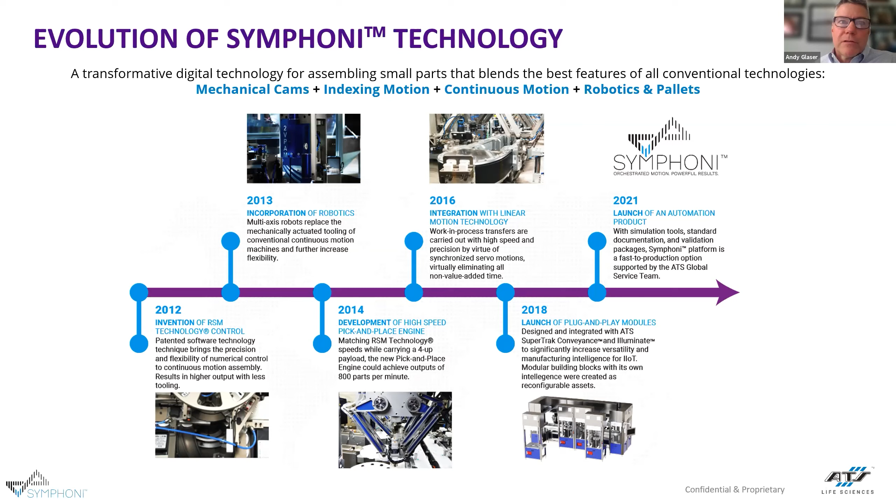ATS recognized the game-changing potential of Symphoni. It's a standardized modular automated technology that offers high performance, precision, and flexibility. In other words, a machine that didn't have to sacrifice speed for flexibility and vice versa, and a machine that offered an alternative to cumbersome, time-consuming custom solutions.

The best part about Symphoni for many of our clients is that you can start with just one of these modules, as you see on the slide. You can use that module, called Sonata, for research and development, clinical trials, or prototyping, before you have to go into low or higher output. And when you're ready to scale up, you simply add more modules. This inherent potential for scalability and simplicity is a big part of what ATS saw as a solution to current assembly problems. The Symphoni asset is completely redeployable, and that is a game changer.

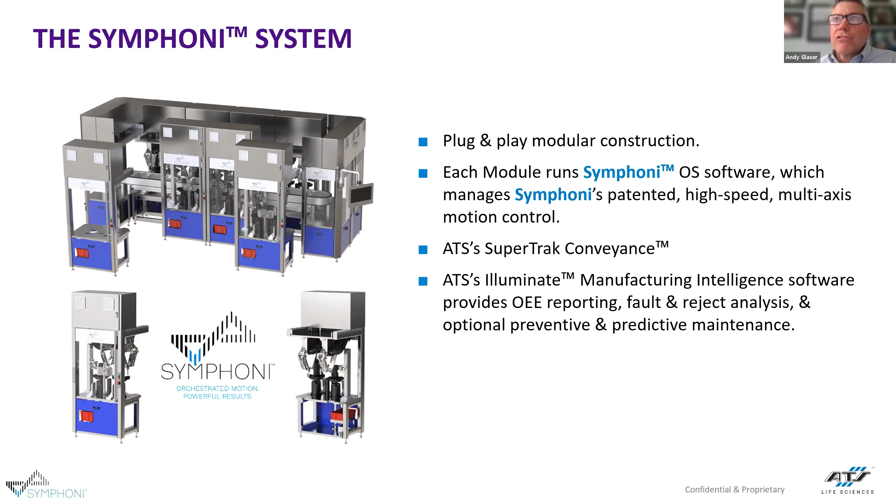We also saw a far more specific synergy, a way to incorporate our SuperTrak conveyance technology and our Illuminate smart manufacturing software. These technologies significantly build on the core premise and make Symphoni the complete package it is today for anyone in the med device assembly business.

So what does all this give you? In short, Symphoni provides the lowest total cost of ownership because of its standardization, modularity, ease of use, and low maintenance. Symphoni improves product quality because of its gentle part handling with friction-free orientation. Symphoni reclaims expensive floor space because of its reconfigurability, as well as its ability to be continually redeployed throughout its life. Symphoni optimizes your assembly equipment due to its operational flexibility and quick changeover.

Thus, the core Symphoni DNA made up from these attributes is why there is now a totally different approach to how high-speed assembly can be automated. Faster time to market, reduced capital investment, and a lower overall price per part translates to a big advantage for manufacturers.

In 2018, when ATS acquired the Symphoni IP and joined the journey of this technology, our CEO, Andrew Hider, said that it was to develop market-leading solutions. With today's generation of Symphoni, we have already demonstrated with real customer projects that we are leading. Now it's time to see for yourselves what I'm talking about.

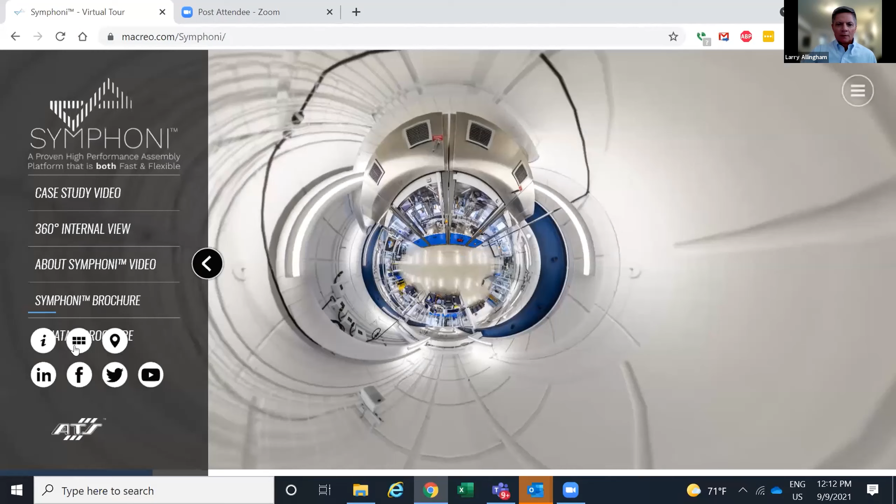Again, I'll add my thanks and appreciation to all of you for joining this tour. It's unique, we haven't done something like this before, so hopefully it'll give you a good overview of what this technology is all about. So what I'm going to do is first orient you as to what it is we're going to take a look at and also where it's located.

As you can see on the screen, we've got a Symphoni machine, or Symphoni cell if you'd like to call it that, located at our Innovation Center at ATS in Cambridge, Ontario. I'll do a little scroll here so you can see how the machine is situated in our Innovation Center, where we're featuring Symphoni as well as other examples of ATS technology.

Before we plunge into details of the machine, I'll make a few introductory comments to reiterate some of the points that Andy and Peng mentioned in the lead up. Again, Symphoni is the technology. It's designed as a unique combination of high speed and flexible assembly automation.

It's packaged in a modular format, which gives it configurability and reconfigurability, meaning that it's effectively serving as a long-lived asset that can be repeatedly retooled for different applications if need be.

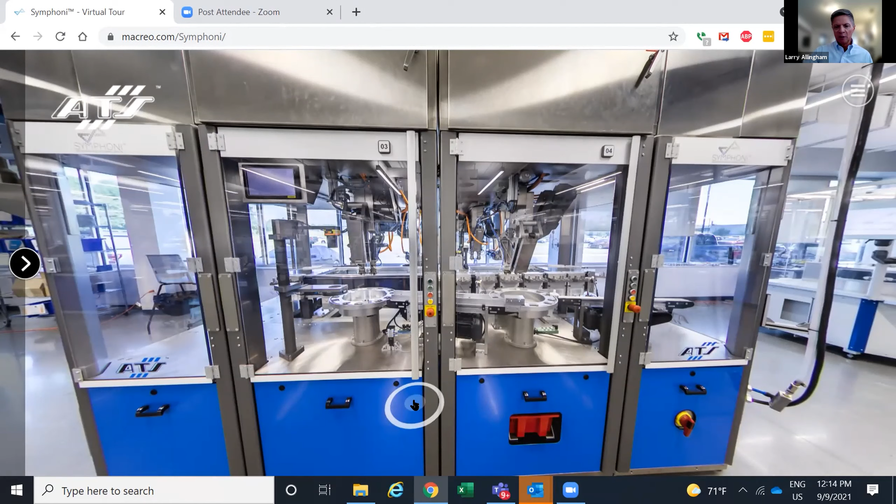First, to orient you a little bit into what you're looking at here, as we've mentioned, Symphoni is modular in nature. This small cell that we're using as our walkthrough this afternoon is certainly an example of that. You'll notice that this basically corresponds, where I'm taking my cursor here, to a module or a working module.

We have two working modules on this side of the machine, two working modules on the back side of the machine, which we'll see a little bit later. And then two other modules on the end that we typically refer to as end caps.

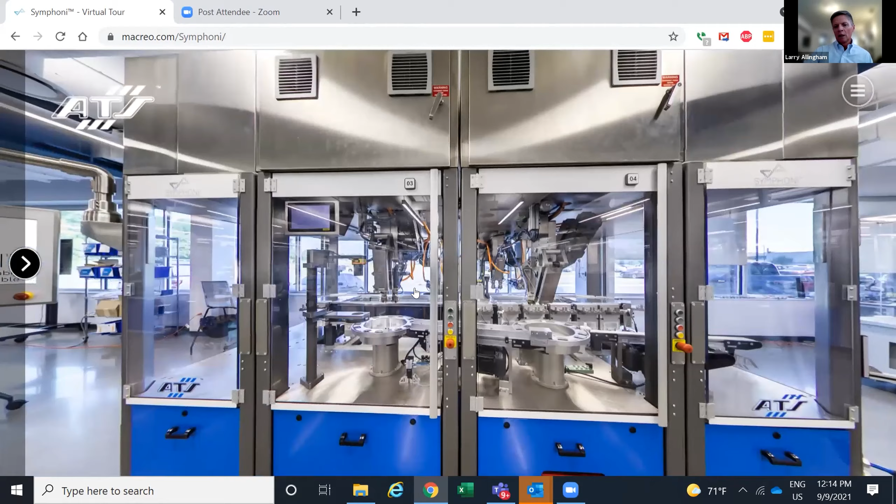One module receives the main power, electrical power and pneumatic, for distribution through the whole system. And the other module houses the electronics that control the SuperTrak conveyance, which is the basis of the transport mechanism for moving work in process through a Symphoni system.

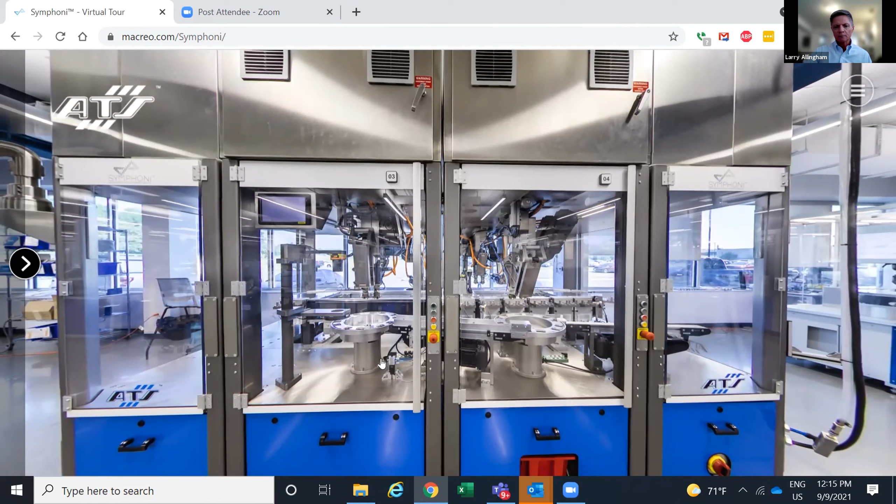To give you a sense of scale, each working module is 1 meter in width. So that gives you a little sense for the size of what we're talking about here.

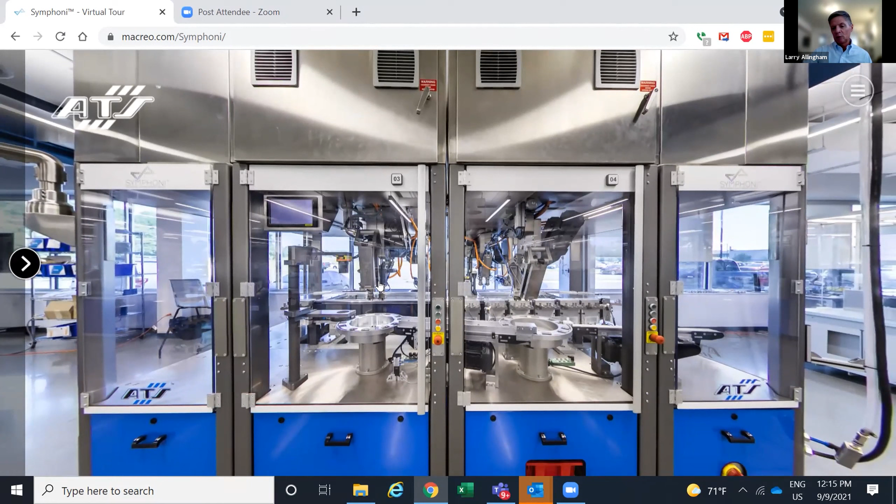You'll notice that within each module there is mounted above it an electrical cabinet. The electrical cabinet houses all of the controls associated with the local control of the automation resident at that particular module. In other words, the control is decentralized yet integrated in a centralized fashion, which you'll see momentarily, to allow the system, when running, to operate in a fully synchronous fashion.

I'll zoom in a little bit and give you a closer view of what we're going to be touring through here. The demo unit that we have basically consists of 4 assembly stations.

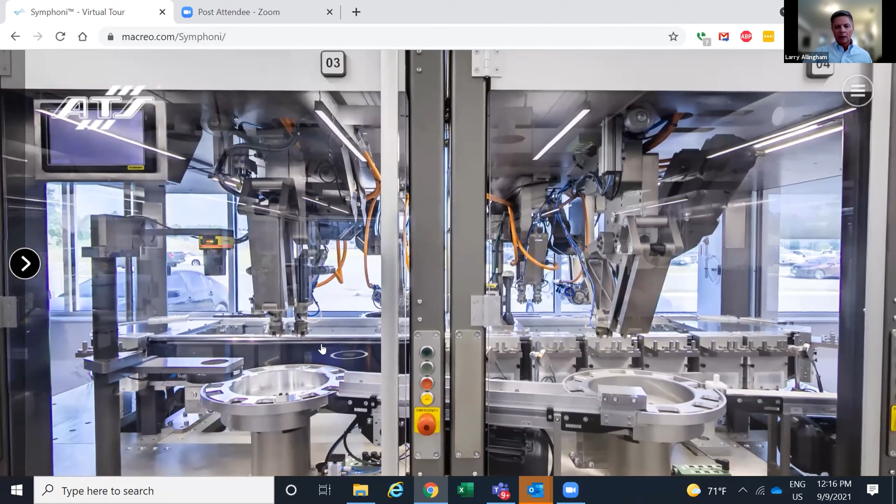We're assembling a dummy product. Basically we're assembling and disassembling repeatedly a simple 2-piece assembly, but a product nevertheless, that allows us to showcase some of Symphoni's operating features.

As I mentioned, the backbone of the system, or the transport mechanism, Symphoni being palletized technology, is the ATS SuperTrak. We'll take a look at that in more detail here momentarily.

You'll see that the workstations consist of a series of robotic stations where we have these Delta robots mounted effectively from above, again resident in each individual module.

I'm going to zoom in here, open up this door, and take a walk in and allow us to explore a little bit more deeply what we have.

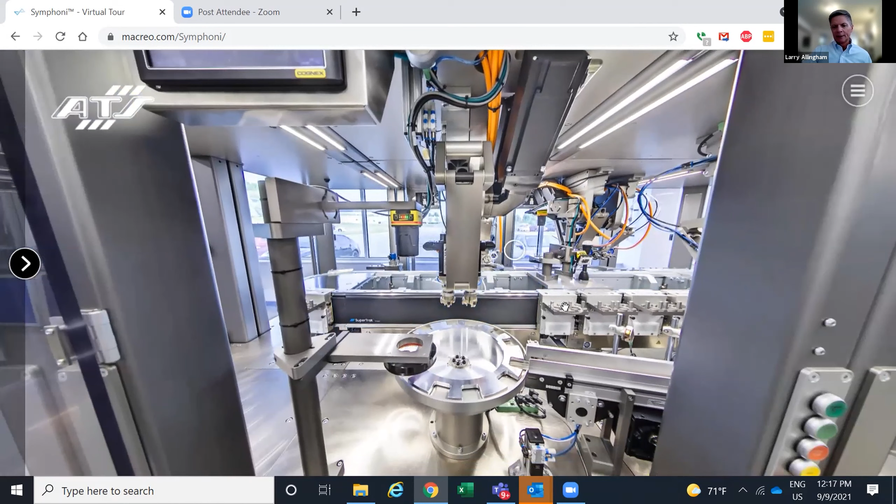So I've mentioned a couple of times the SuperTrak conveyance. Just a few words about SuperTrak. As Andy mentioned, that was one of the additions that have been made to Symphoni technology since ATS acquired it.

Basically, using this long-running flagship product of ATS that's been in operation for 20 years or so as the basis of moving materials through the system.

So SuperTrak is a linear motion conveyor, which basically means that the pallets in the system are moved electromagnetically. That gives very high speed capability for the pallets with precise control of their accelerations, decelerations, and positioning.

We're able to stop pallets at any point along the SuperTrak without requiring lift and locate mechanisms or any other type of external stopping or positioning mechanism. So it gives a lot of flexibility, very clean, low wear, high speed operation.

So I'm going to click this link here and allow you to take a look at a SuperTrak system, or a Symphoni system with SuperTrak, in operation.

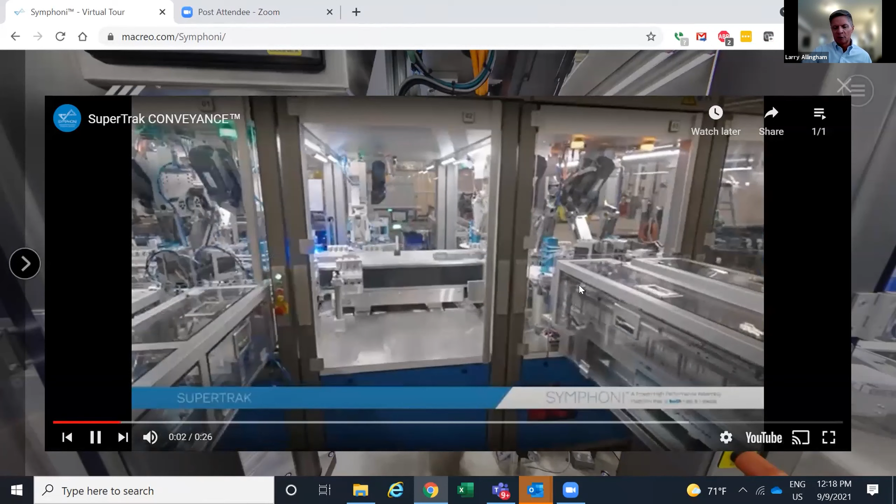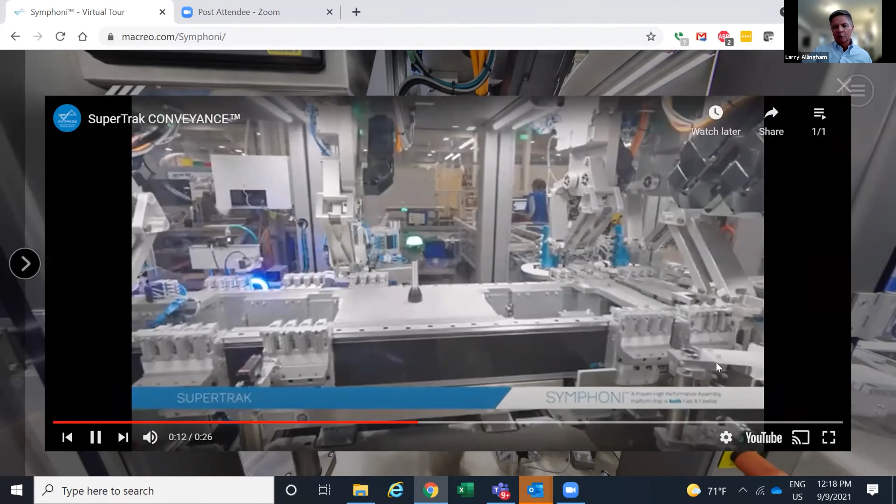It's not this machine, the demo machine, it's a production machine as it was being readied for a factory acceptance test at ATS recently. I'll let this video run through a couple of times, but you can see SuperTrak pallets moving freely, positioning themselves at different points, accelerating and decelerating rapidly to precise positions.

You'll see repeatedly as we go through our demo this afternoon that when SuperTrak is integrated into a Symphoni system, effectively what happens is we're able to take advantage of the high-speed positional accuracy of the SuperTrak pallet, synchronized with the motions of the high-speed Symphoni robots, such that pallets spend the bare minimum time necessary in each individual workstation to allow the operation to take place.

Returning to the demo again, to the unit that we're focusing on, we'll take a look first at this particular station, which is kind of characteristic of what you'll see throughout Symphoni applications. It's what we refer to as a pick and place station, sometimes called a pick and place engine. Basically what it consists of is this high-speed Delta robot.

I'll talk about that a little bit more momentarily, but as I mentioned before, it's mounted from the ceiling of the system. What the robot does is it interfaces with this device, which is what we call an RSM disk, or rapid speed matching disk. Andy mentioned that term in his lead-up, and you'll see what this really does when I start playing a couple of videos for you. Effectively what the RSM does is it serves as the intermediary between the robot, the pallet, and an external feed system for parts being delivered into the system.

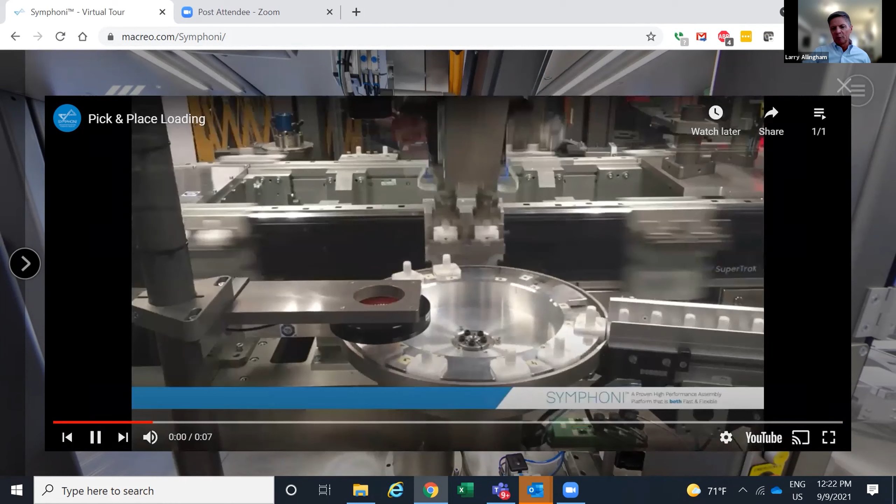And what this also does is very clearly indicate what is unique about Symphoni, because as you're seeing, as I let this video run repeatedly, high-speed pick-and-place operation: parts coming in, the parts can come in random radial orientation, our camera takes a picture of the part, the robot with its rotary end effectors picks the parts out of the disk during the transfer to the pallet, corrects the radial orientation, and places them on the pallet.

And again, with SuperTrak's high-speed capability and precision positioning capability, you can see that a very minimal amount of time that the pallet is actually in the station, and that the operations are basically carried out such that we already have the parts in hand in the robot as the pallet arrives. So really eliminating all of the non-value-added waste that typically occurs in an assembly system, a palletized assembly system in particular, where you're waiting for a pallet to come in, waiting for a signal to say okay, I can start my operation, carry out the operation, and then move on.

In Symphoni, everything is effectively electronically cammed together, all motions in the system, in such a way that we have complete synchronous operation, as if everything were mechanically geared, as if every single motion were on a line shaft. But it's digital and configurable and flexible, which is what gives it its unique power.

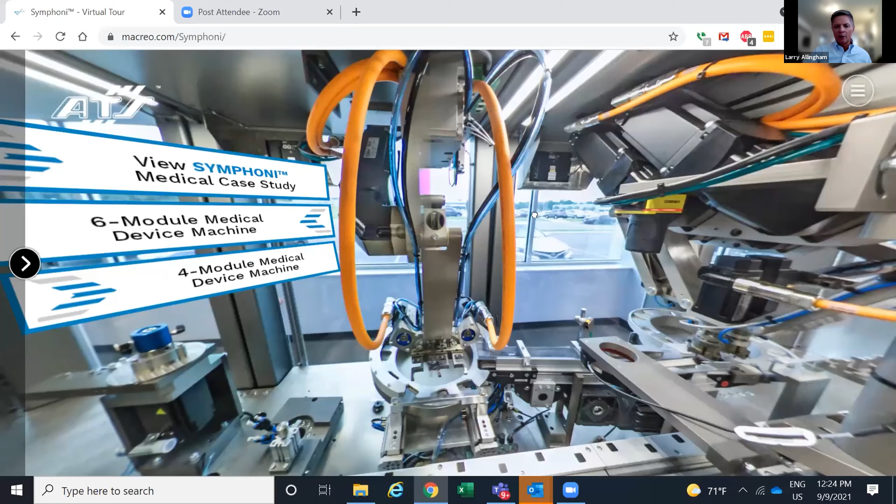So we'll jump in a little bit deeper here, again just kind of taking a quick tour around to see some of the other stations that are in the demo and point out some other features of the Symphoni technology. So the station that we just took a look at is this one right over here. We saw it from the view on the outside. This was the station just upstream of that that's delivering the parts to this particular station for orientation and placement. But taking a look here, we can get a little bit better view of what's going on with these robots, which are mounted at various stations around the unit.

So just a little bit of background on why is it that we have a customized robot as part of the Symphoni system. There's a couple of reasons for that. It wasn't the original intent when we were developing the technology.

We thought maybe we could use standard off-the-shelf robots, particularly high-speed deltas, to be serving as the basis for our operations. But we quickly discovered that because of communication requirements with external controllers and things of that nature, we couldn't get the throughput that we wanted to achieve with Symphoni with off-the-shelf robots. Furthermore, we needed to have the ability to do some pretty significant force-bearing operations that are characteristic of most assembly applications.

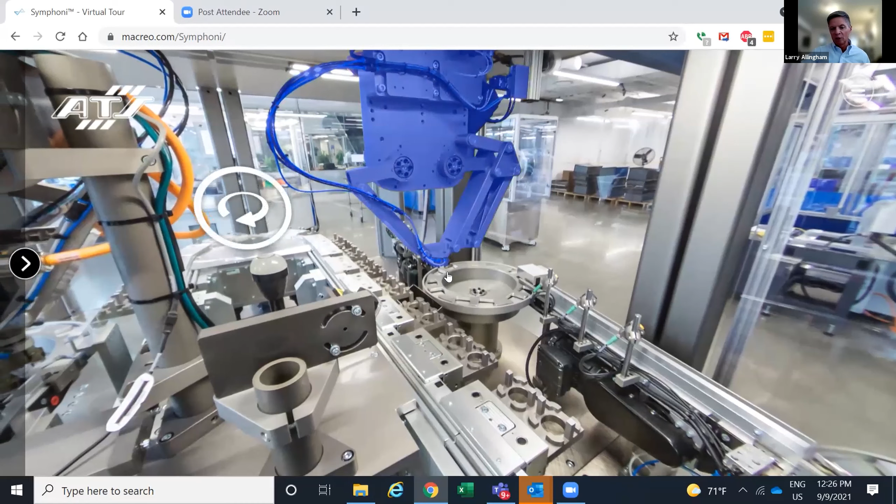And we're moving quickly in a very narrow band. We're just moving basically between the disk and the pallet. So we have a relatively low, short stroke in, let's call it the Y direction, and we also have positional capability in the Z location as well.

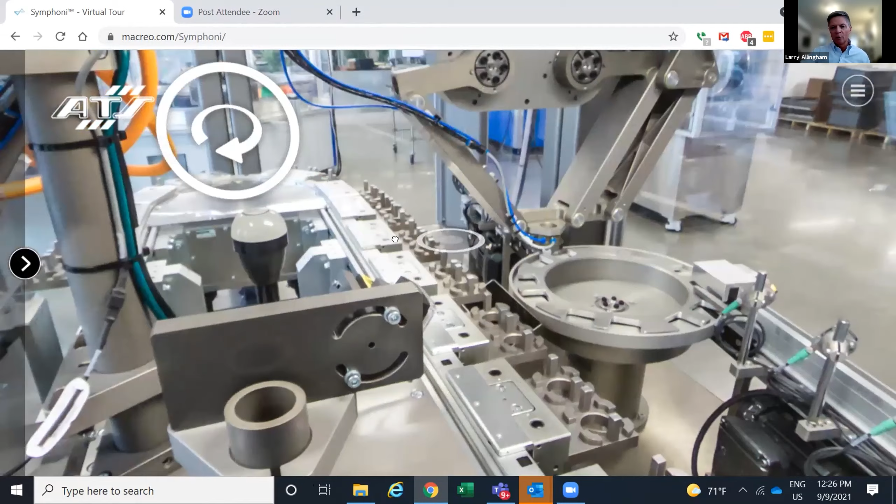And then, depending on the type of end effectors that we place on the end of arm tooling, you see different examples of that. We'll see more as we go through. We can carry out additional servo-based operations, whether it's inversions or radial orientations or what have you.

Let's go down to this end of the system, and hopefully I won't make you too dizzy here by kind of spinning around slowly and taking a look at the system from this particular perspective, and zoom in a little bit here to see some examples of different types of end effectors.

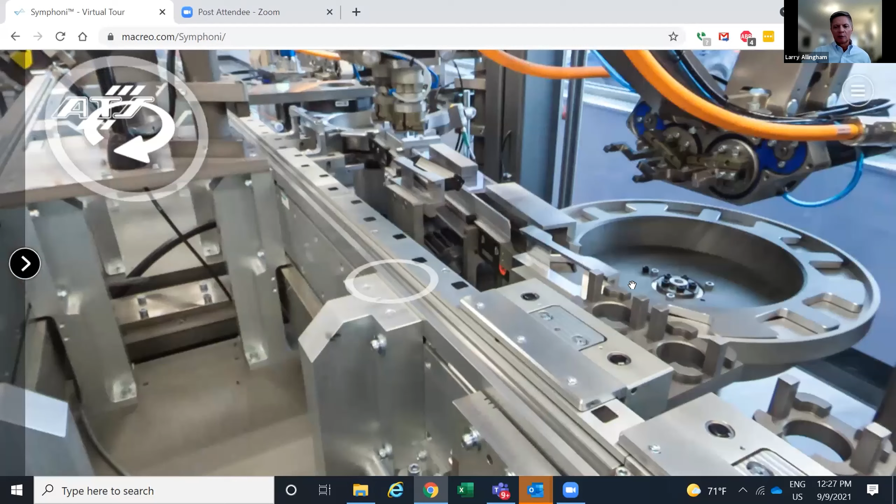This end effector here, again, everything above the base, above the end of arm tooling, is completely standard. The end of arm tooling is first configurable with what we call a deck, and then part specific tooling that's added to the deck to allow us to carry out different types of operations.

This end of arm tool is designed to do an inversion operation to rotate a part 180 degrees. And then, as we've seen before, we have end effectors that can be equipped with rotary servos to do radial orientation.

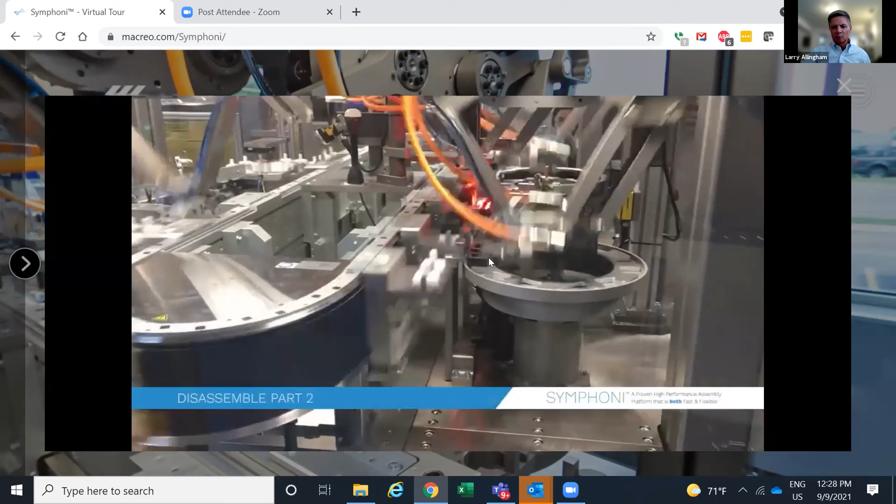So just to allow you to see a couple of other videos here to give some examples. Again, same demo unit. This particular station is doing a disassembly operation of a second part that has been assembled, placed back onto the disk and delivered back to the previous station for loading.

Just a point of note, the demos, the videos that you're seeing in the demo, we're operating obviously in a 2-up palletized environment. The output or the throughput of this system is 280 parts per minute.

That's far from the maximum capability of Symphoni. The Symphoni robots have been designed to stroke at a rate of up to 200 strokes per minute.

Typically, we limit the stroke rate that we use in actual applications to 150 per minute, which means that at any given station, we can typically process in a 2-up environment 300 parts per minute, which again, for palletized assembly systems, now we're getting to speeds that are much more characteristic of hard tool technologies like continuous motion.

So we'll leave the demo unit momentarily just to take a quick look at a couple of other smaller, if you will, 3D tours that we have of a couple of production systems.

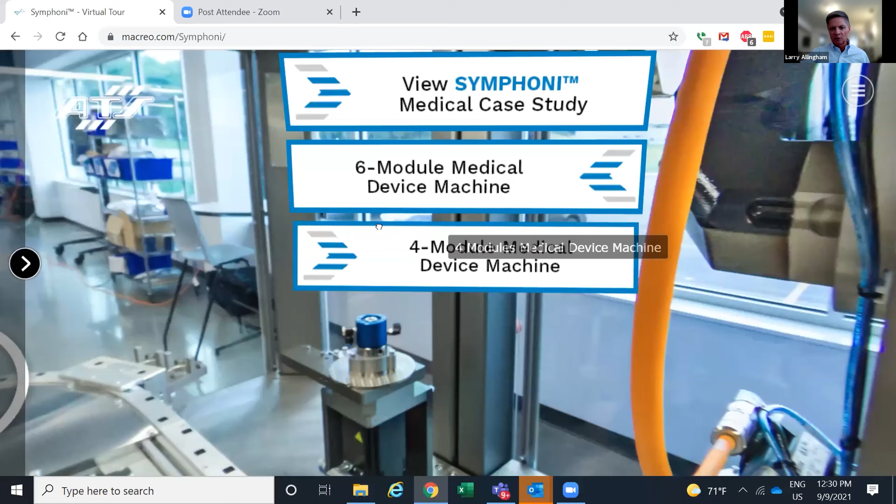This is a medical device system, or medical device assembly system. And here we actually see what a system looks like when we've got it configured with external feed systems.

So as is more typical than what we're seeing in the demo that we're walking through here today, external feed systems feeding parts into one of these RSM disks, which are then captured, oriented if necessary, or checked for orientation if necessary, and then the robot makes the placement to the pallet.

This particular system, I think, has a total of 4 working modules associated with it. We have another one that I will show here that's a little bit larger with 6 modules.

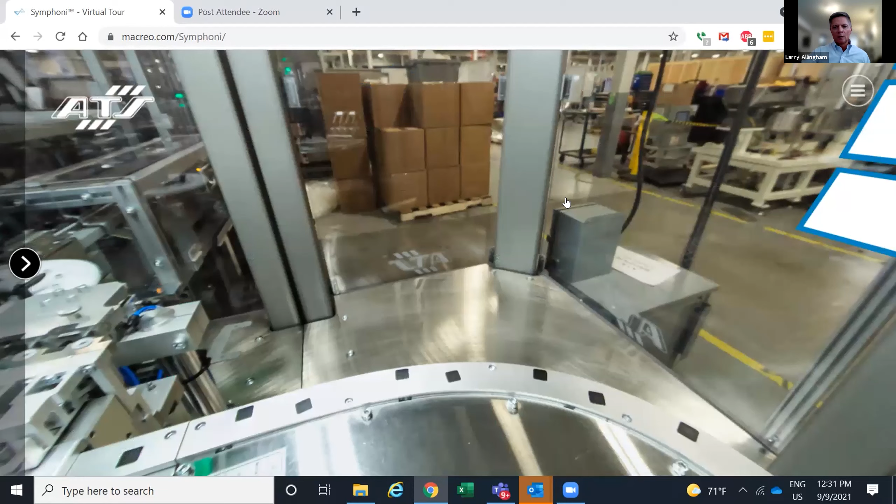You can get an appreciation for the very high level of standardization here. Completely different products, different physical configurations in terms of number of modules, but again, very, very high level of standardization. Basically, what's changing at any given workstation, particularly for assembly operations like pick and place, is just the disk, which is specific to the part, and the tooling interacting with the part. Pallet fixtures are also going to be specific to the product. But the robots themselves, the control system, the overall infrastructure, a very high percentage of the total investment is taken up in completely standard, configurable and reconfigurable assets.

This can become extremely important for a customer that has multiple variants of their products, or multiple products that would typically be placed on separate machines. In many cases, those can be grouped together into one high-speed Symphoni system with quick change tooling between one product and the next, allowing you to conserve capital, floor space, etc.

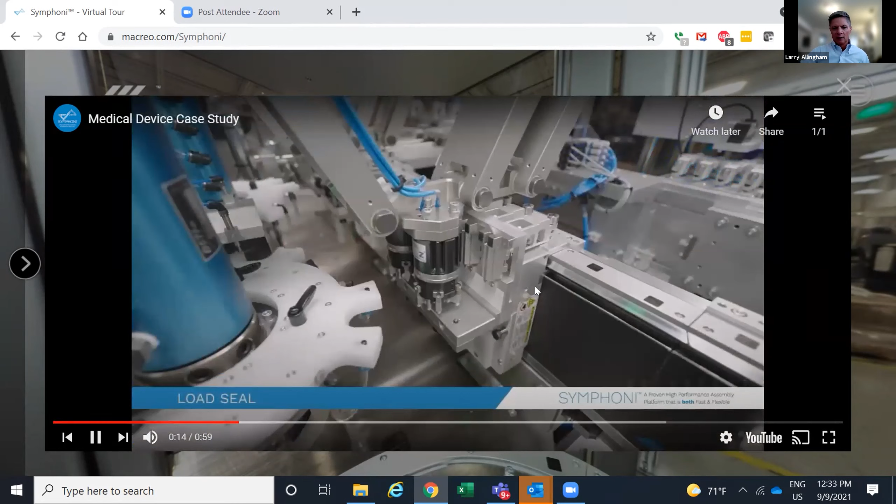Here we're seeing high-speed placement of O-rings, assembly of a device to the seal, assembly of a third component, and assembly of a fourth component. We're operating in a 4-up environment here. I believe the output of this machine is 300 parts per minute.

This is taking advantage of SuperTrak's ability to rapidly stop positions. What you just saw was a series of inspection operations, doing final inspection of the assembly before it gets to the unload station.

So back to the demo unit. I'm going to exit the interior of the machine. Bear with me as I spin us back around to where we can see - it's right back here. So we're back to the front of the machine again.

One thing I wanted to point out is that we've mentioned the system operates with decentralized plug-and-play modules, but when the system is in operation, you have complete integrated motion such that all motions in the system are basically electronically cammed together. So even though each module is controlling what's going on at its individual module, it's doing so with reference to a master cam, which in most cases is the SuperTrak pallet system itself, defining in a 360-degree cycle, at each point, and serving as the master cam for all other motions, devices, and modules to be specifically referenced to.

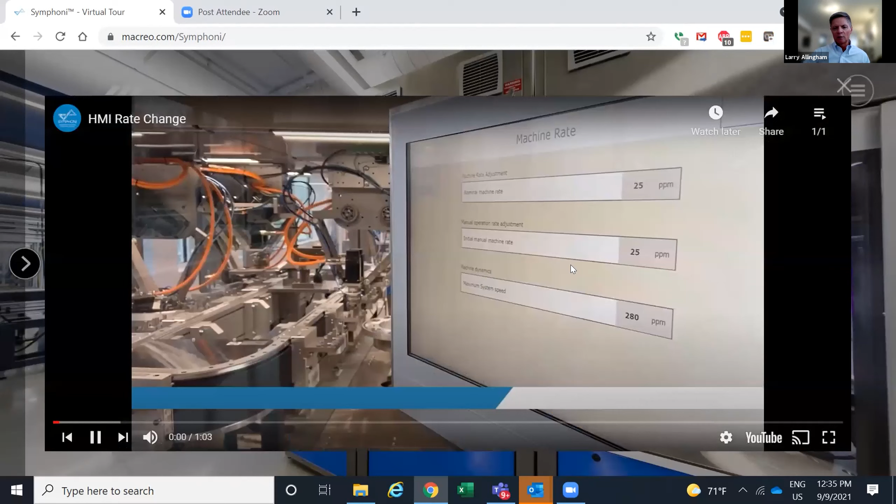That allows us to do some very interesting things, which I'm going to show you by taking a look at the HMI - an example of not only what's possible through the HMI, but also of how the system functions in this integrated fashion.

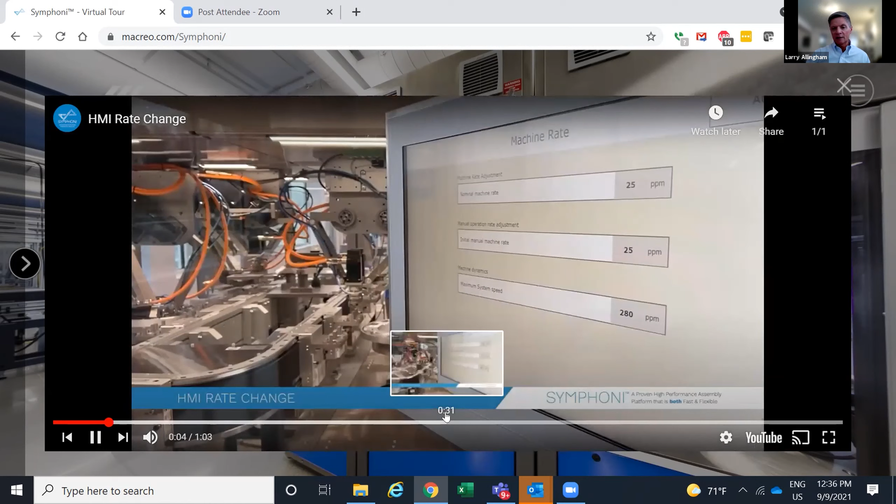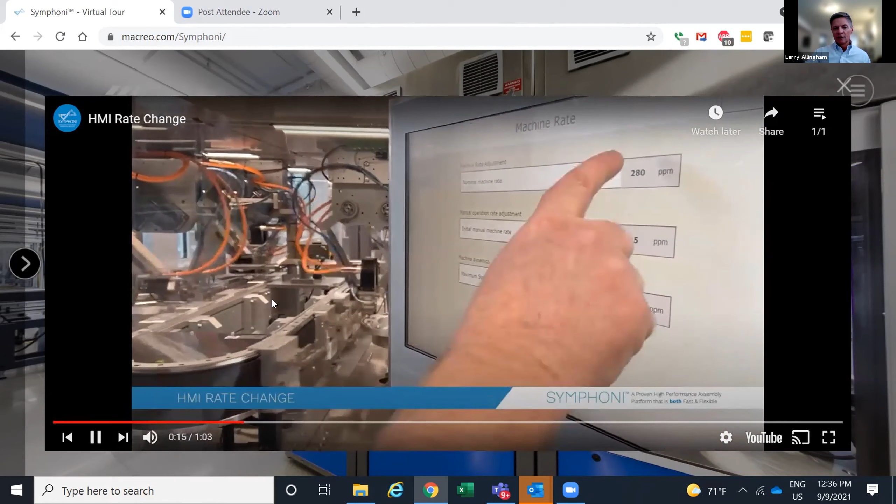What you're seeing here is the operator changing the rate at which the system operates, repeatedly toggling it between 25 parts per minute and 280 parts per minute. The 280 parts per minute is the design rate of the demo system. 25 parts per minute is just an arbitrary number that's been selected. The operator could select to run the machine at 100 parts per minute, 150, or even 1 part per minute, and regardless of the speed selected, you see the same integrated synchronized motion system-wide.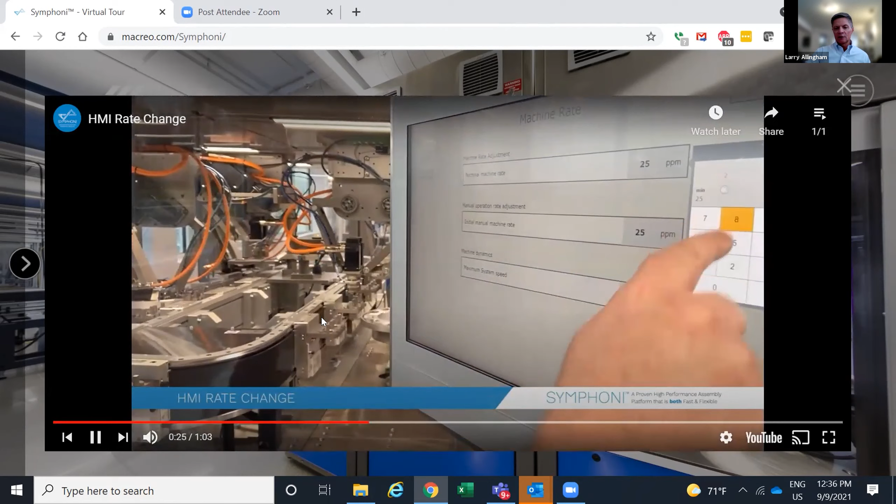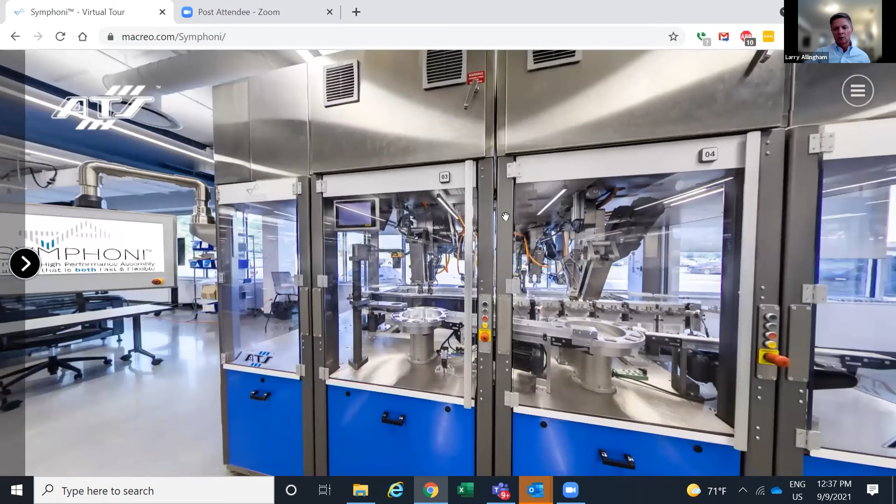This reflects the control methodology with its electronic camming control, and the efficiency of the system in terms of minimizing non-value-added operations, basically eliminating waste, allowing very high throughputs, but again in an environment that is digital, flexible, and highly standardized.

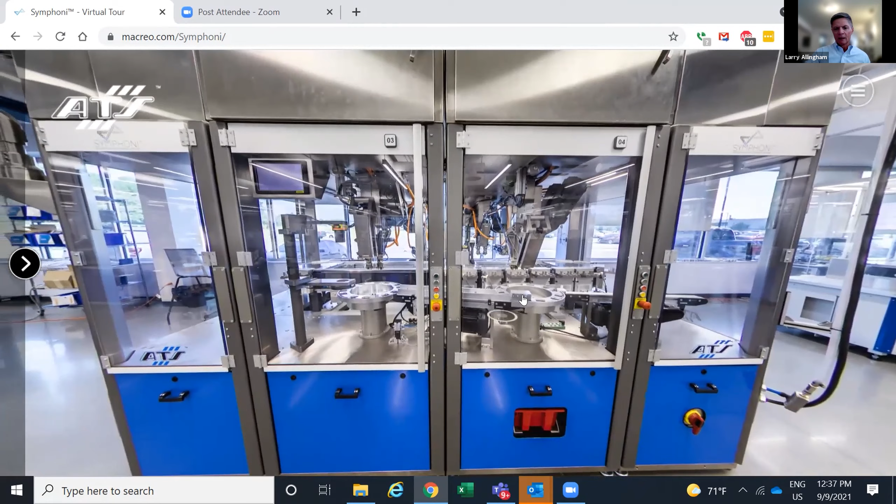I'm going to conclude by giving you a couple more views of the system, walking you around to the backside if I'm adept enough to get us there. One other thing I'd like to point out, which you can see on the back side of the machine here, if I can get us there.

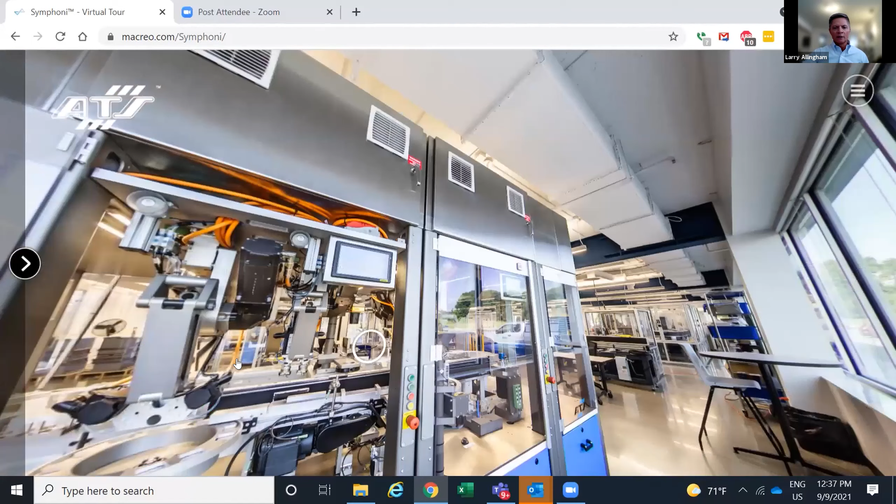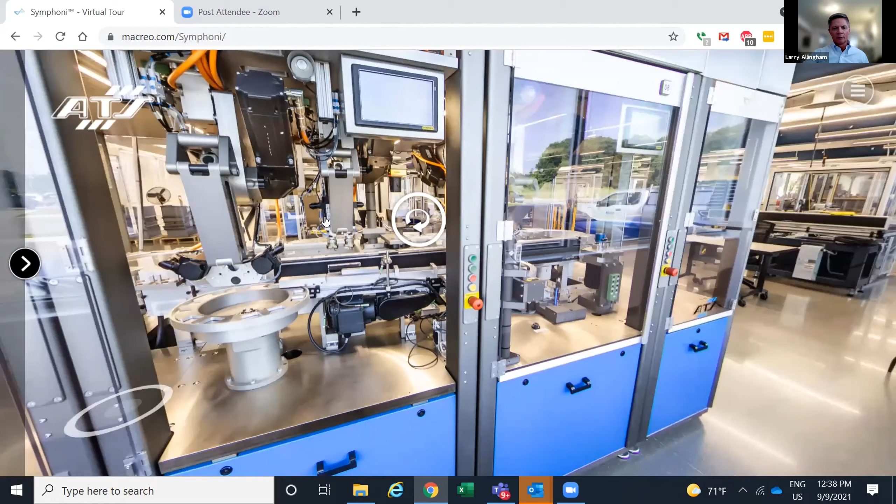In most cases, what we've seen on the demo is one robot per module, but as shown here, we can house up to two robotic workstations within a given module - robot 1, robot 2. This enables us to have a nicely densely packed, compact system that conserves floor space and gives a very high output per square meter. Another good feature benefit of the Symphoni technology.

So with that, I've given you what I hope is an initial high-level overview of the technology. Maybe the next best thing to being there in front of a real machine is seeing what we've been able to take a look at this afternoon in this very brief 3D virtual tour.

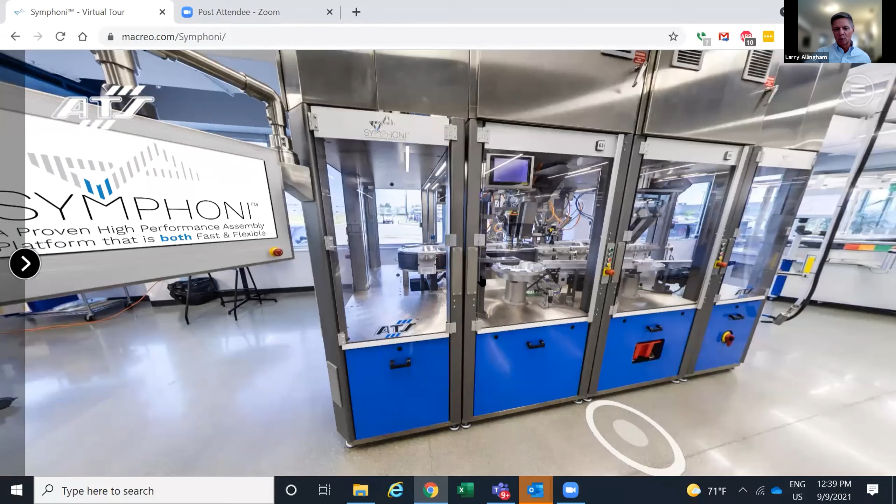Again, this is a very high-level introduction. I'm certainly interested in responding to any questions you may have, either now or after the webinar, and would be interested in exploring in much greater technical depth some of the features, benefits, and operating characteristics of the system.

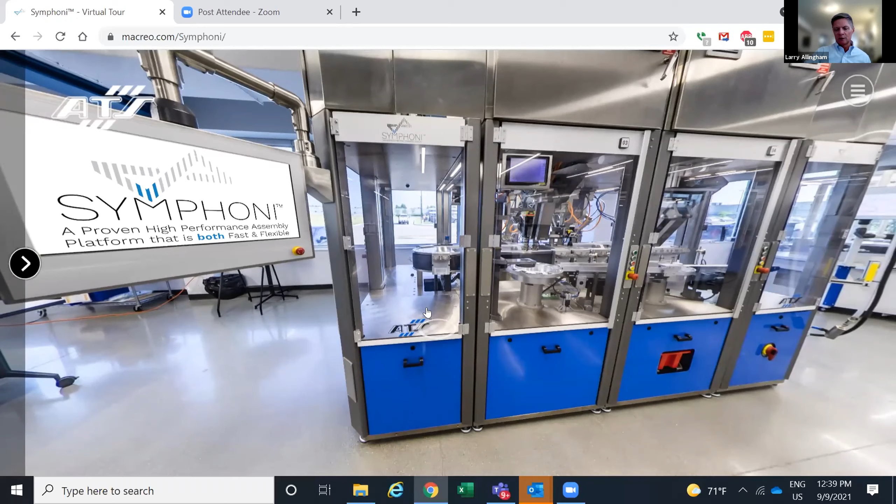This video gives other examples of the precision and control that's possible with Symphoni. It's important to show these kinds of videos because sometimes people's initial reaction when they see something operating at high speed is, 'oh my goodness, this must only be good for rough applications,' because it appears very violent. But when you look closer at high speed - for example here, doing high-speed O-ring placement - things are carried out with great precision and great control.

I think that pretty much concludes what I wanted to share with you this afternoon. It was very quick, very high level, but again, I'm certainly interested in responding to any of your questions now or others that may crop up afterwards. Thank you very much for your time and attention.

Question one: what is the maximum force the robot can apply? Larry? That's a very good question. I hesitate to give the answer - I'm going to have to defer that, take that question to that person and get back. I think I know, but I don't want to give a number and find it to be wrong. So rather than say what I think off the top of my head, I'd rather get back to you with the real answer.

Fair enough. Question two: is this platform already in healthcare and life science applications? Yes, absolutely.

Question three: what is the pick and place payload? Again, another question I'll have to defer and get back with a specific answer to. I'm thinking this person might want to sign up for the live interactive Q&A, Larry.